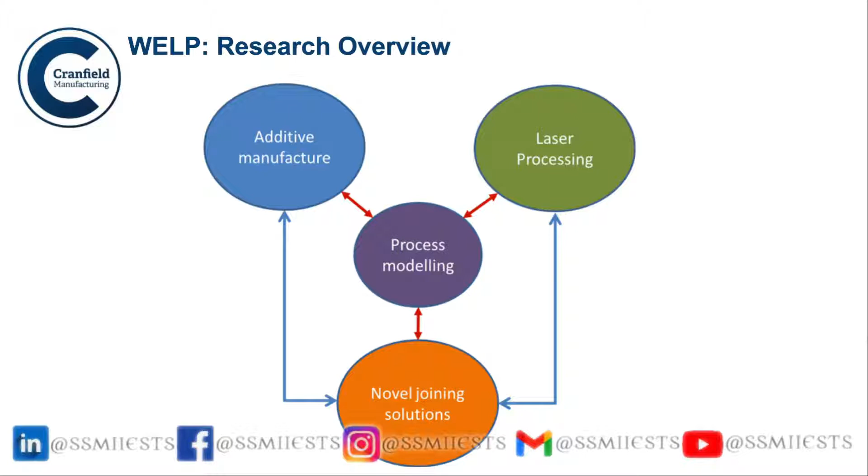So the research overview is we have three main wings of research, which are additive manufacturing, laser processing, and novel joining solutions. These are the three main activities that we have, and they're underpinned by process modeling. I will talk mainly about laser processing or laser joining in this particular session, but I will just give you a quick view of the

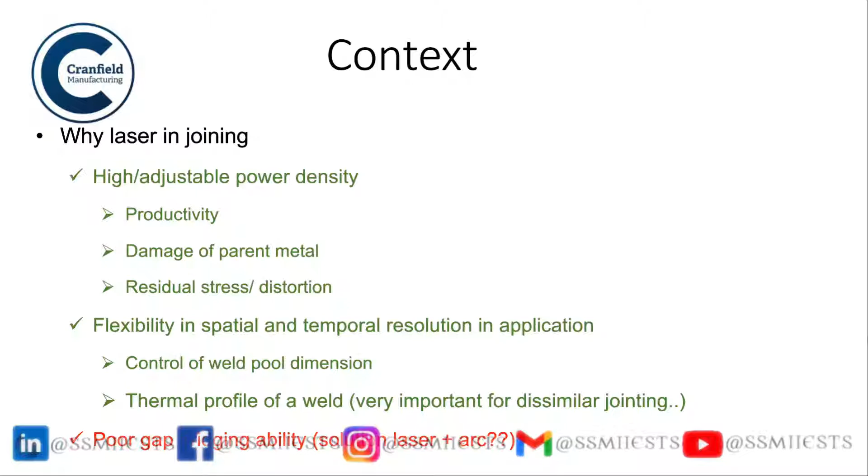However, laser has a disadvantage, that is poor gap bridgeability. This is a very important thing actually. Because when you do a joint, often the joint is not perfectly aligned. So you need your power source, or the heat that you're applying, to have gap bridging capability, and in that laser would not be very good. So a solution could be laser together with arc. That gives you the final solution on this.

So, possibilities with a laser. With this particular slide, I would like to show the different ways you can apply heat in a manner that forms the weld pool at a particular location. You can see these are two alloys, A and B, and you can have a weld pool with more of A, less of B, or something like an interlayer X, because it is required when you have dissimilar joining. So I will explain that.

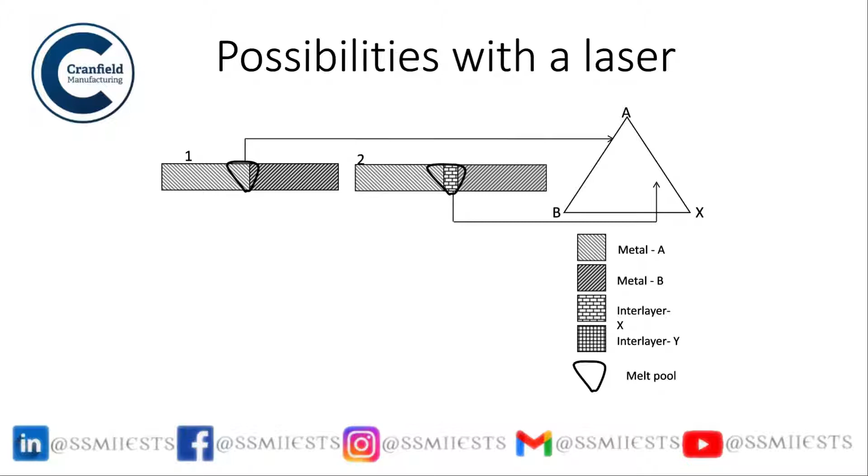And accordingly, in the metallographic constitution, you can have different compositions or different phase fractions depending upon how your weld pool is formed. So basically, what I'm trying to impress on you is you can control the solidification path in order to avoid certain possibilities, or you can lower the susceptibility of a system to crack.

Similarly, you can have different dimensions of the weld pool. The third one in the second row, I will demonstrate in one of my works how I use that. I will also show with a case study how you can have different dimensions of weld pool, and thereby control the composition and the diffusion of one parent metal into the other.

In the third one, as you will see, the weld pools are formed in all three different locations, and that is important in order to understand or prevent the diffusion of one atomic species into another, which gives you intermetallic compound formation and other problems.

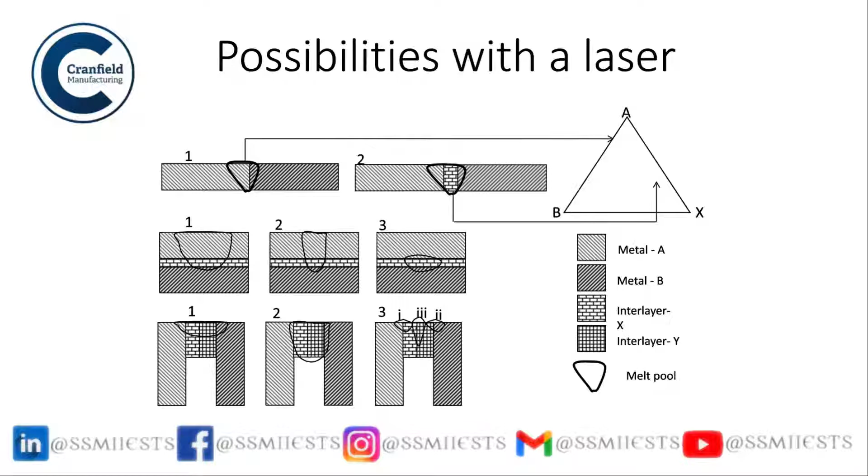So as I was talking on dissimilar joining, there are several reasons why you need to do this. This brings topological optimization in a design. They can use the complementary properties of different alloys within a particular component. There is very high use in transport, automobile, e-mobility sector, health and medicine, and also electronic sectors, particularly for battery applications in e-mobility.

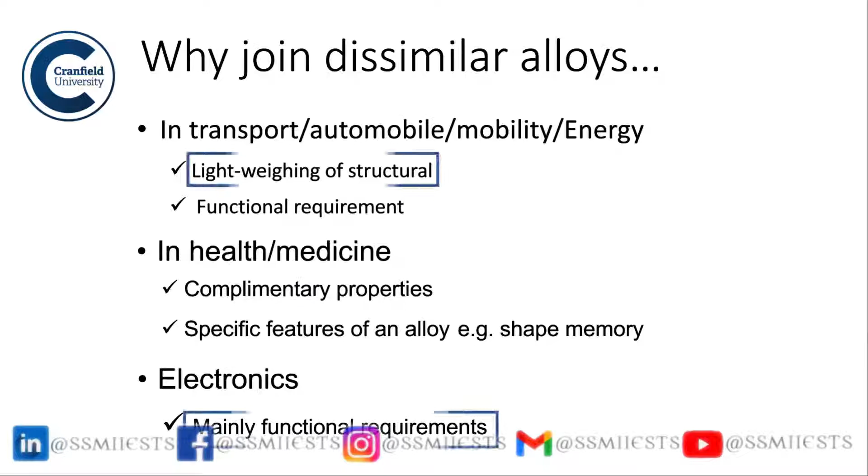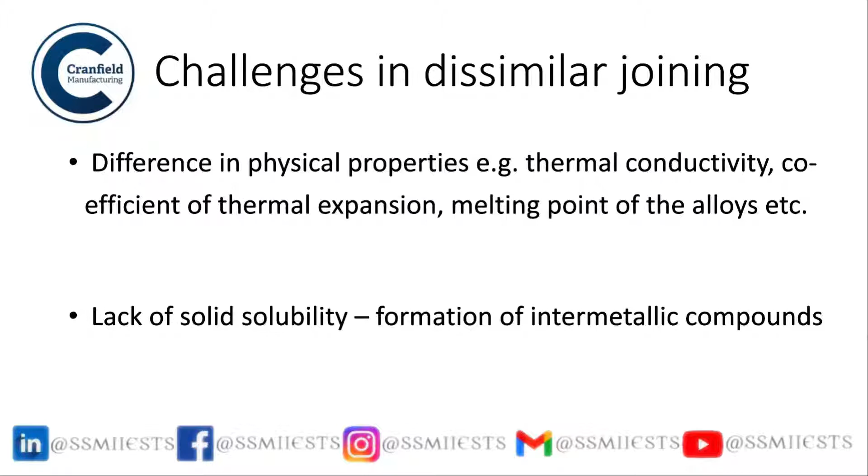I will talk about these two primarily in this presentation. So what are the challenges in dissimilar joining? There are two basic challenges. One is the difference in physical properties, be it thermal conductivity, coefficient of thermal expansion, melting points, and so on. The second, which is even more complicated, is lack of solid solubility, which leads to formation of intermetallics that are very brittle and can cause serious damage within a weld metal.

These are some slides which show the problems that happen when there's a difference in physical properties: non-uniform heat distribution, thermal stress, non-uniform composition, and difference in melting point resulting in intermetallic formation, which is the most complicated to solve amongst these.

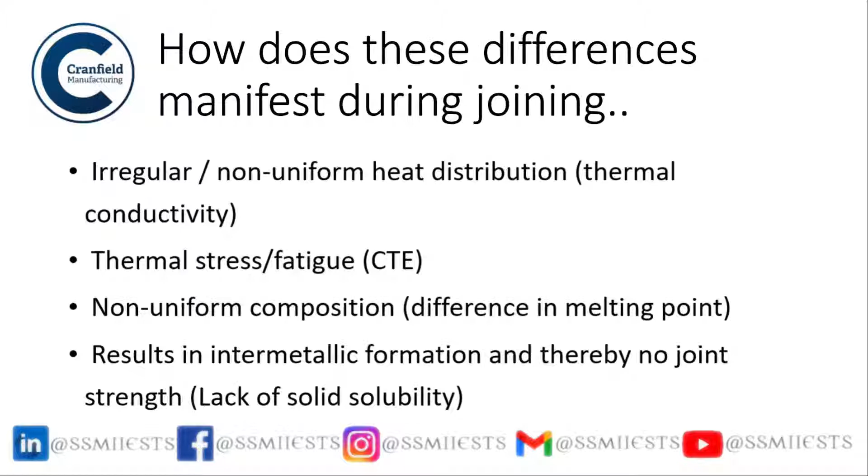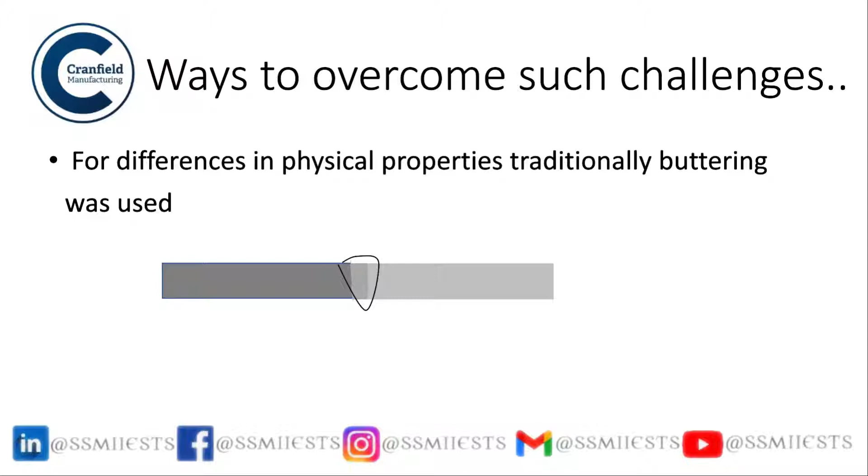So ways to overcome this: for physical properties, if alloy A is joining to alloy B, and by the shade of gray I'm trying to show there is a difference in physical properties, what you do is add an interlayer, or a buttering layer, between them. Once you machine them, you can create the joint, and thus avoid problems like thermal stressing, bending, and even solidification cracking.

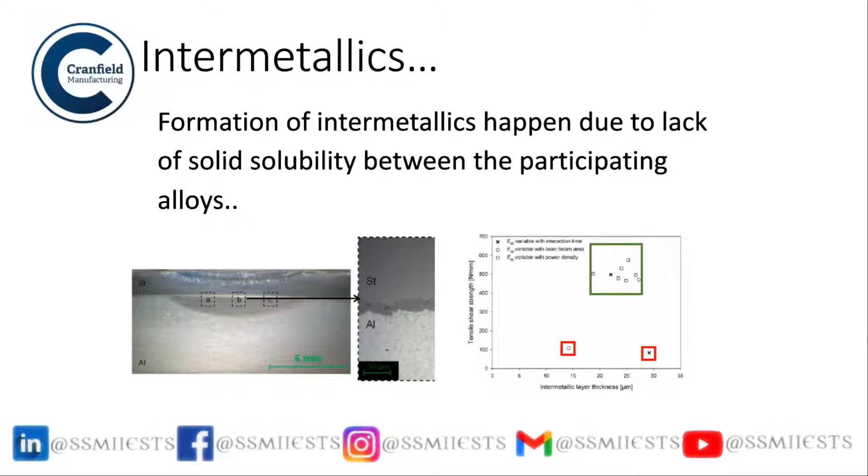Now this is another graph which shows how the tensile shear strength, on the y-axis, varies with the intermetallic layer thickness. As you can see, at a lower thickness you can also have a lower strength of a joint, and that is because it depends not only on the intermetallic amount or volume, but also on the total welded area. This was studied in this research, and we tried to form the solution for joining aluminium to steel.

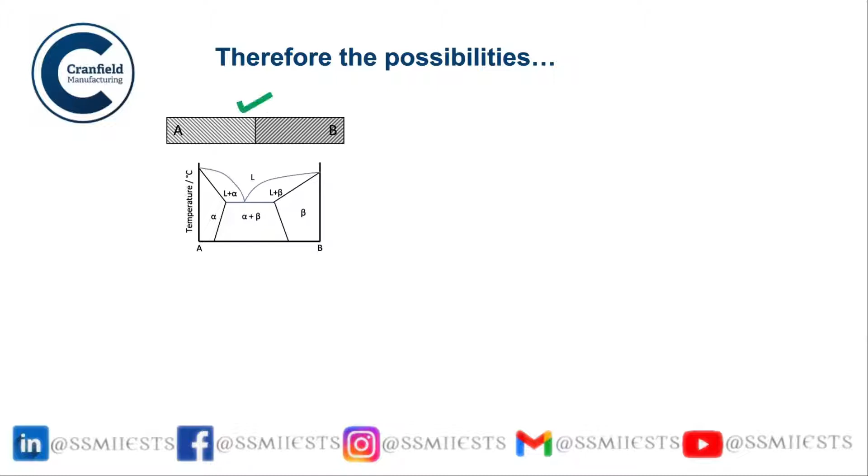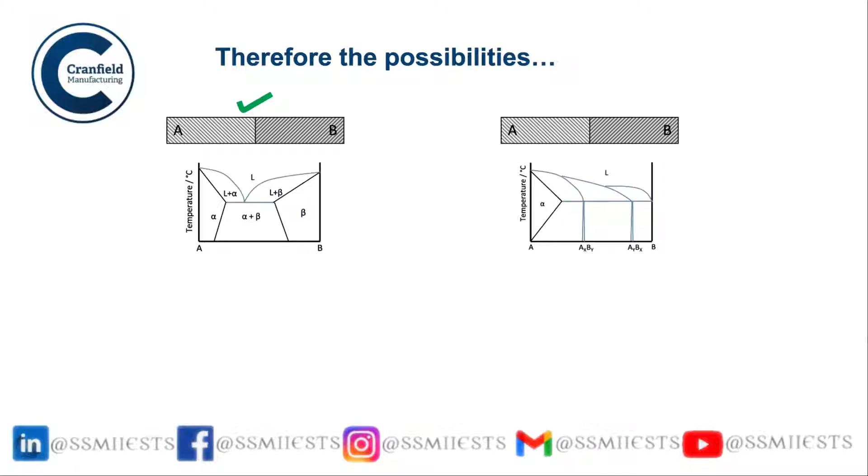So what are the possibilities when it comes to intermetallic? When you join an alloy A with alloy B, it can be perfectly fine—they can have nice solid solubility amongst each other, and you have no issue of joining. Similarly, you can have a scenario where there is practically no solubility at room temperature between the two alloys, which will give you excessive intermetallics, making the joint liable to fail.

Now, this will not work. So what is the option? You can have another interlayer, which is C. You have to ensure that A goes well with C, and B goes well with C, and therefore you can make a joint. However, it might happen that both do not go well with C—say B doesn't have any solid solubility with C. Then you might have to introduce another interlayer, and that will give you the solution.

And now I will show you with some of the work that I have done how this was possible.

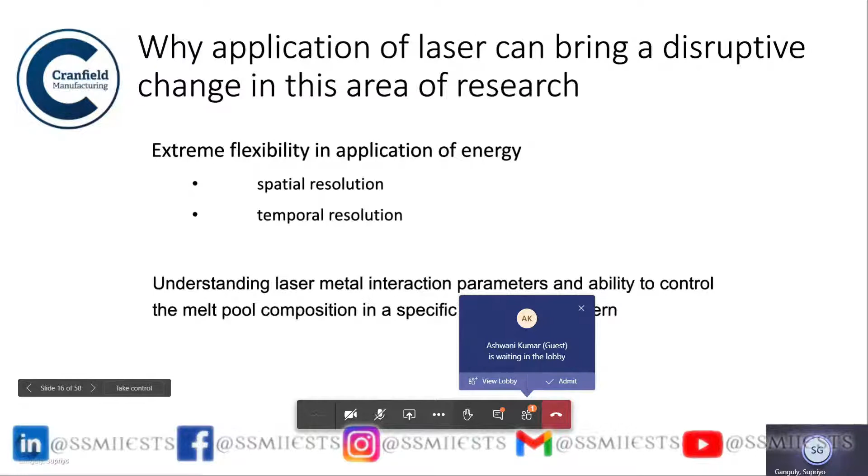So laser is the only power source that can be used for such type of application, as it gives you the required spatial and temporal resolution, understanding of laser-metal interaction parameters, and the ability to control the melt pool composition in a specific and desired pattern. So these are the two reasons why laser will be practically the most appropriate solution when you form such joints.

So as you see, this is a laser beam, and the spot size of the laser, say, is d, the diameter. What we see in a machine is laser power, travel speed, and spot size. But when we convert them, what the metal is seeing is basically power density, the interaction time - demonstrated by this small animation - and then the total specific point energy that is applied on a joint.

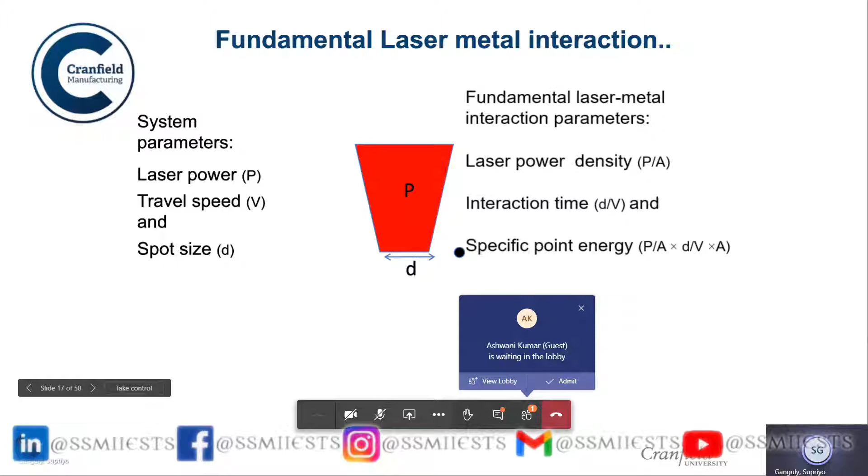So you need to understand a process from that perspective in order to make it suitable, and also so that you can do work with different lasers, because this d normally changes with different lasers, and that is an important thing for you to appreciate.

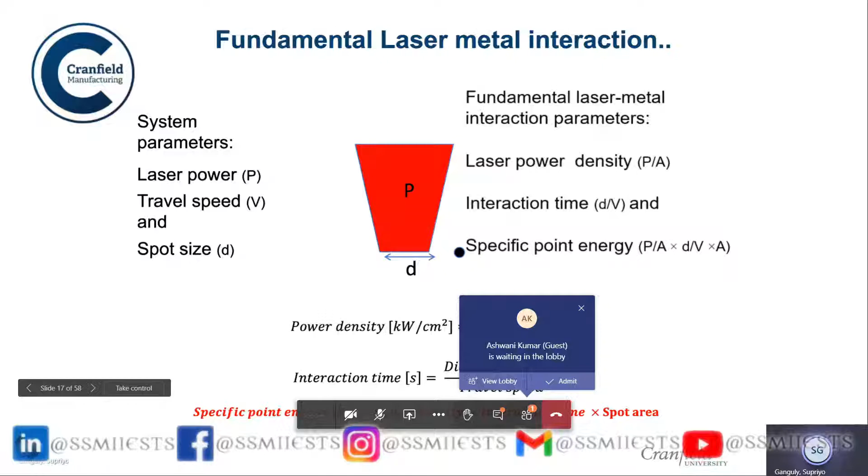So there is an example of a paper published from our department. It is in the area of basic laser-metal interaction.

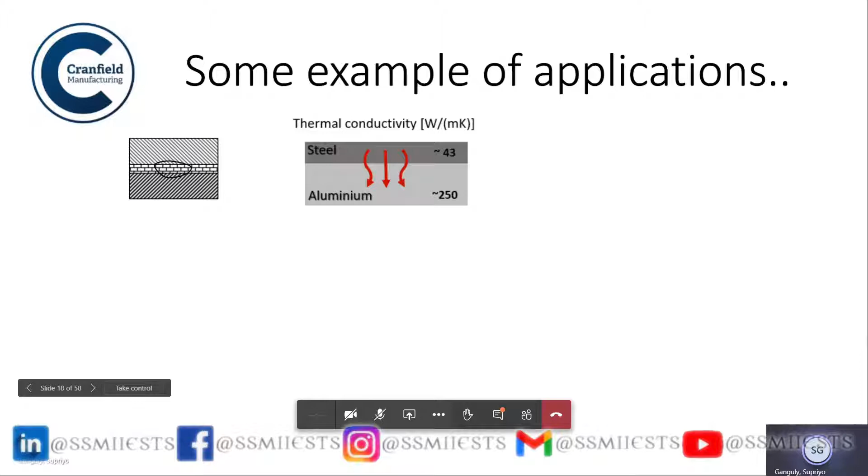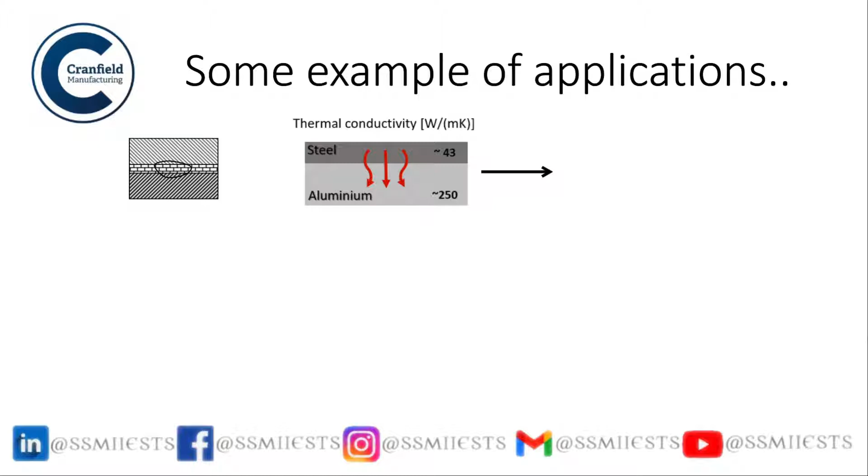Some applications now - as I said, you can have a scenario where you conduct the heat from steel to aluminium, because the conductivity of aluminium is much higher compared to steel. And you can always use a copper backing bar here. So the heat is conducted from steel to aluminium, and you principally avoid melting, avoiding creation of a fusion zone with all molten steel and molten aluminium.

Because that would be catastrophic in terms of intermetallic formation. You can see nicely the difference in the melting point of both of them, and that gives you the basic possibility to create such a joint.

However, you can see here, this is the actual macro of that, and at the top it is molten. The steel is about 2 millimeter thick. Now you can see this molten steel at the top, so you really cannot create a gradient where at the interface aluminium will be molten, which basically means 660 degrees centigrade for pure aluminium. But for aluminium alloys it might be 550 and so on.

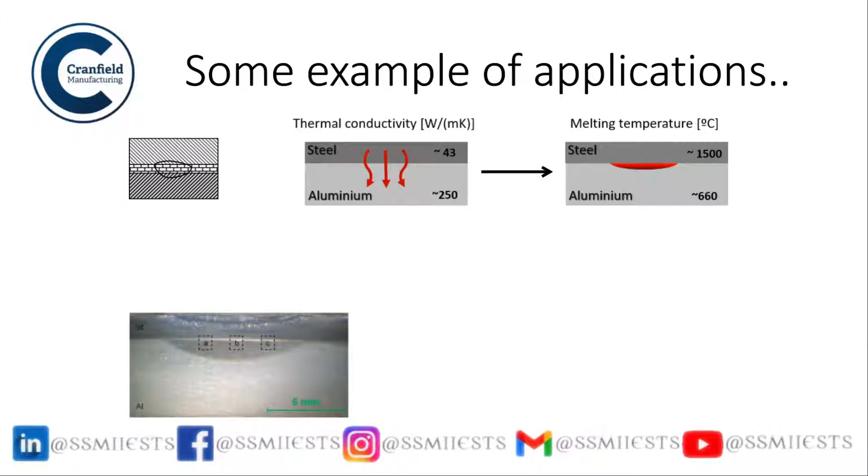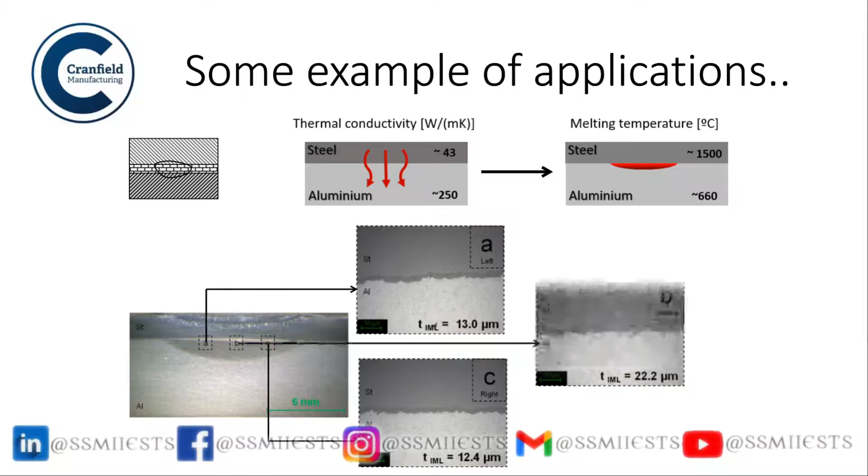And here is steel, which is roughly 1470, 1480, like that. So you can see you can create a kind of thermal gradient that will allow aluminium to melt at the interface and wet the steel. And based on that, you can then study the intermetallic formation in the different parts.

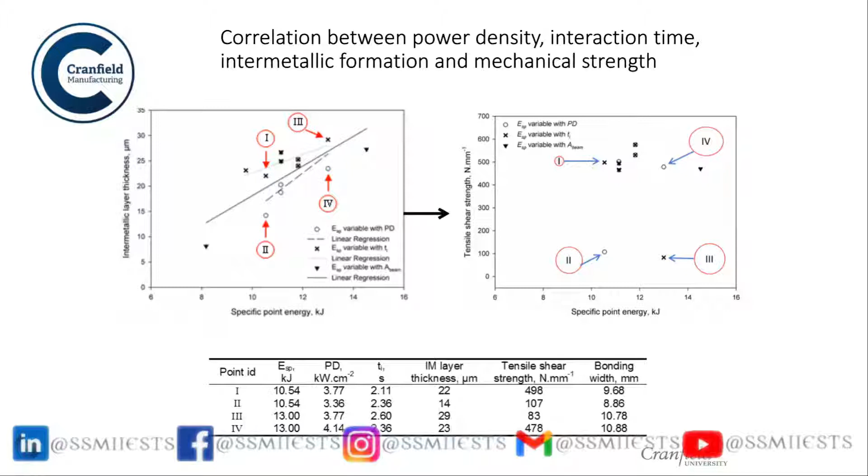And this particular combination was found in this work and explained in this particular article, which is written by my student Sonia.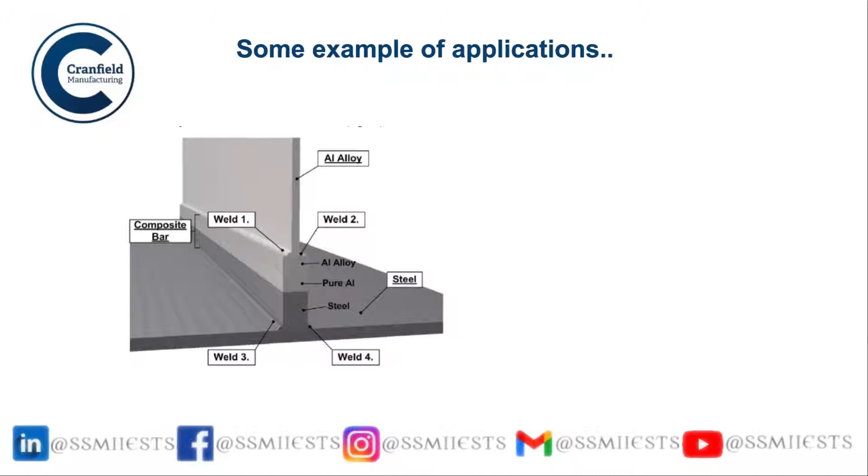One example is in the ship hull structure, where presently this kind of composite bar is used, which is explosion bonded. So this is steel, this is aluminium, and this is the explosive bonded bar. The steel part is joined to the steel part and the aluminium part to the aluminium part. This increases the cost for manufacturing a lot, because you need an expensive bar plus 4 weldings, whereas normally you can do it with 2 arc weldings.

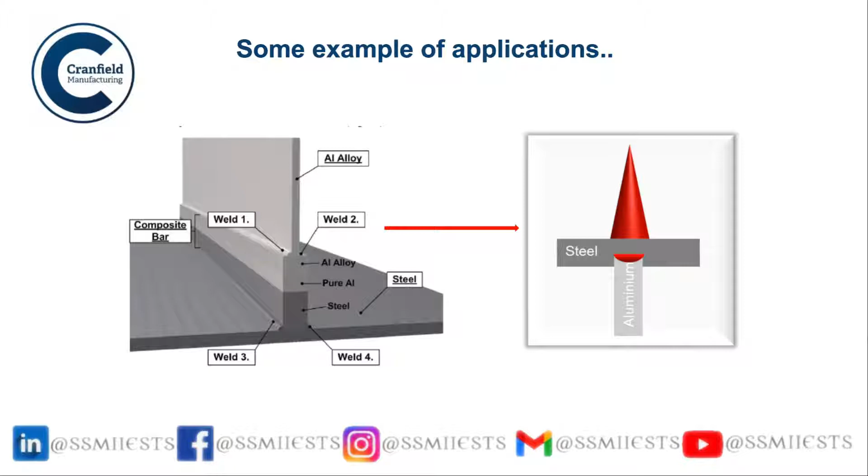So what we proposed is a structure like this: steel and aluminium go inside, and when the laser comes like this, a design modification was required to make it suitable for a specific application. The heat should pass through the steel and form this joint. This is done using a setup in our lab, and basically a T-joint is formed at the end of this process. So it will be possible to use laser in an intelligent manner to modify the design of a structure in order to create a joint. These are particular examples of how laser can be suitable for such thick structures.

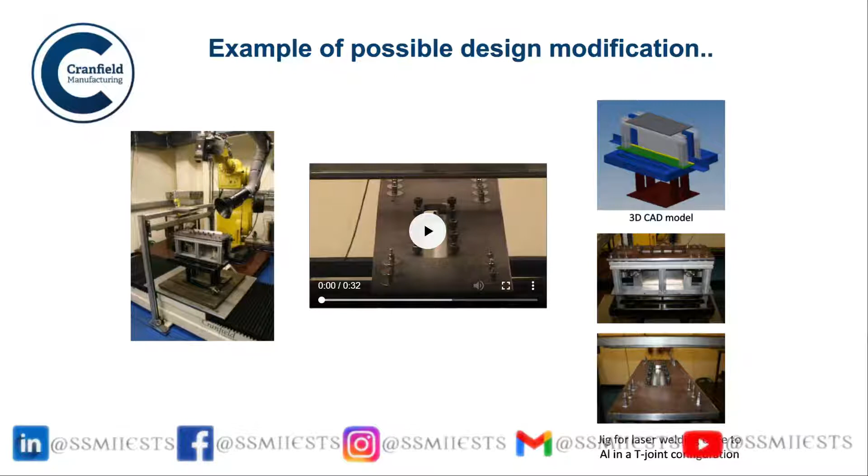Another example is microjoining. I'll talk about joining stainless steel to nitinol. Nitinol is a shape memory alloy, with very good applications in dentistry as well as other medical applications, and it often needs to be joined to stainless steel.

The problem here is serious, because stainless steel contains iron atoms, and nitinol contains titanium atoms - nitinol is basically 50 atomic percent nickel and titanium. So titanium and iron are a no-no situation. They cannot form a solid solution, and the intermetallics they form are absolutely brittle, so you cannot form a viable joint between iron and titanium.

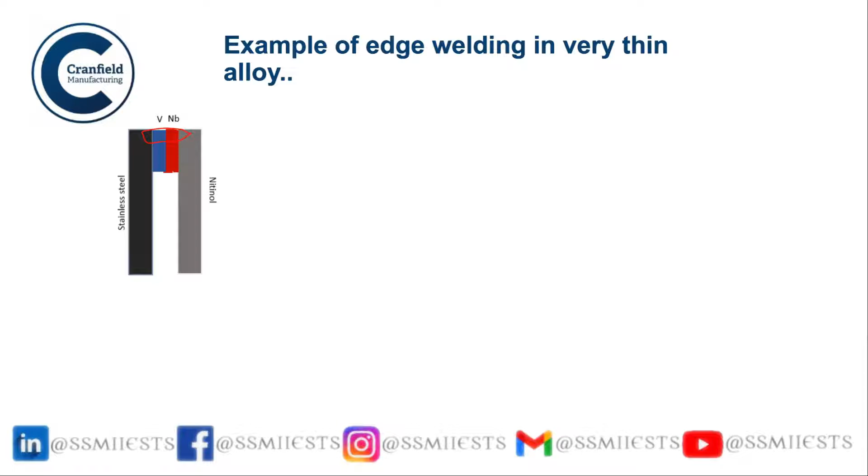So a study was done in our center to understand how we can form joints. Recalling my previous schematic explanation, we use two different interlayers: one is vanadium, the other is niobium. Vanadium is good with stainless steel, niobium is good with nitinol, and vanadium and niobium are good with each other. But if you form a weld directly like this, what happens?

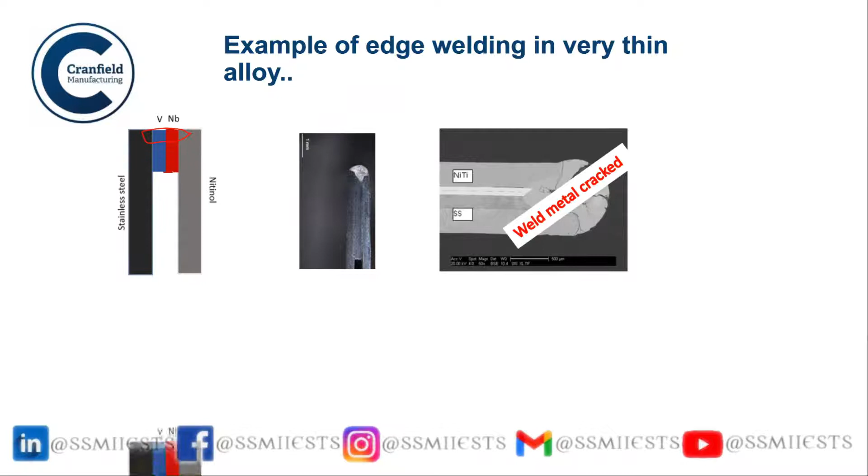You completely crack it, because the titanium atoms can travel through this melt pool and form this brittle intermetallic on the other side. However, if you do separate welds between vanadium and stainless steel, niobium and nitinol, and then vanadium and niobium, then it is possible to achieve a good joint.

This was subjected to very strong testing, and you see here the breakage happens from the nitinol side, so the weld metal itself is okay. If you understand the reason why something is cracking, and take necessary design precautions in manufacturing, then most likely you will be able to achieve a good solution towards the end.

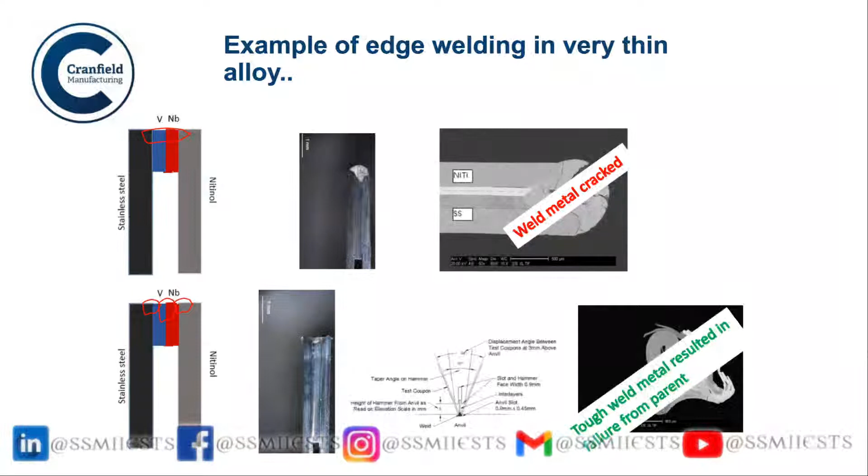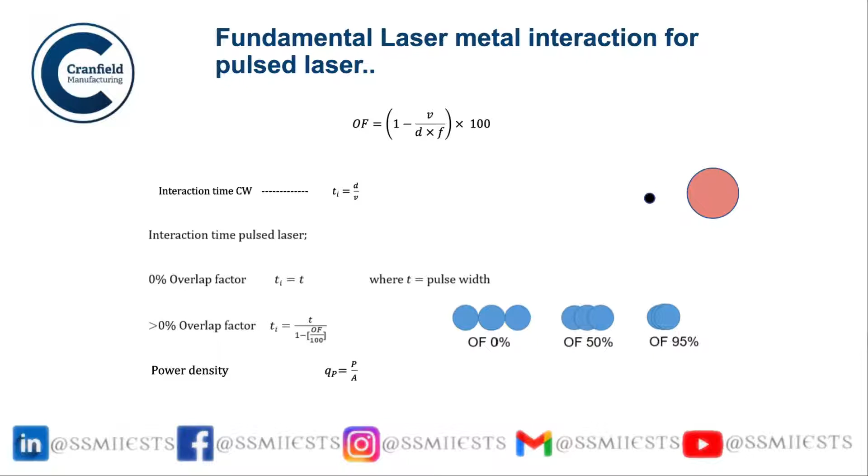I tried to show how different overlap factors can be effectively built into the interaction time calculations, helping to get a proper understanding of how much heat is actually applied in a particular situation. Now I'll talk about some applications, some battery applications in new mobility, where I'd discuss joining of copper and aluminium.

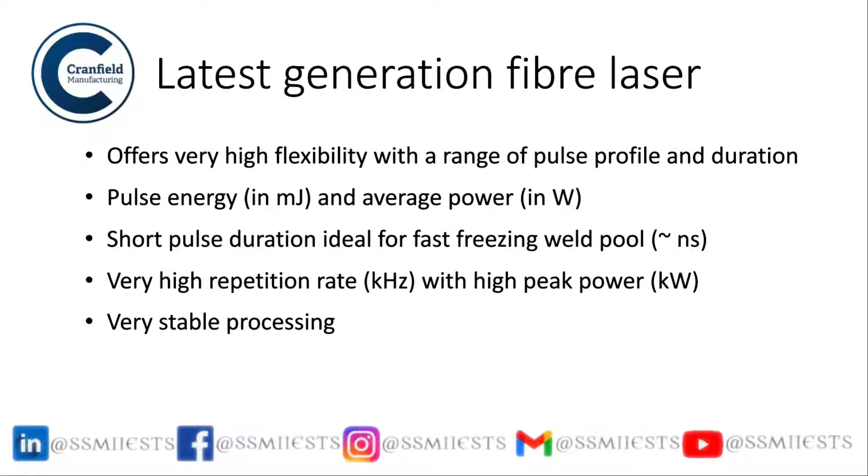The latest generation fiber lasers offer very high flexibility and a range of pulse profiles and durations. Pulse energy and average power can be controlled very well. Short pulse durations are ideal for fast freezing, which is important for dissimilar joining. Very high repetition rates allow a reasonably high peak power and average power, giving very stable processing. All these factors make it a very good tool for dissimilar jointing.

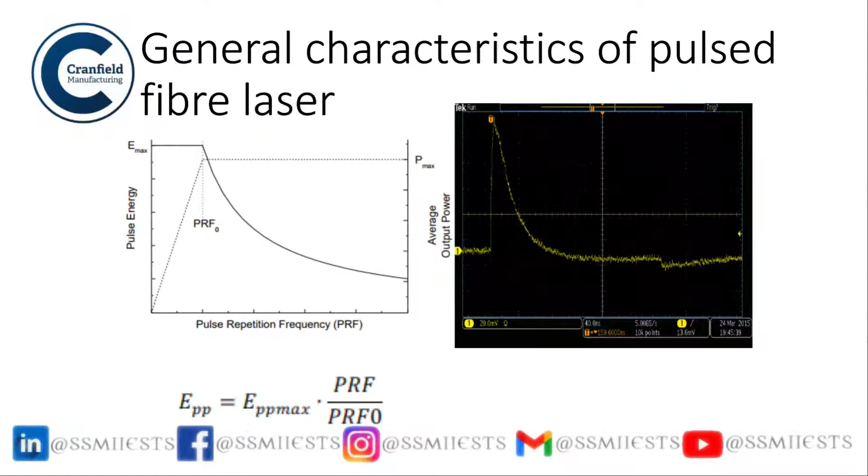And this is an expression of how the energy applied, maximum energy in a particular laser. So with the help of a cathode ray oscilloscope, we basically deciphered how the different pulses behave and act before we apply them. So this particular graph basically is showing how the energy per pulse changes with the average power.

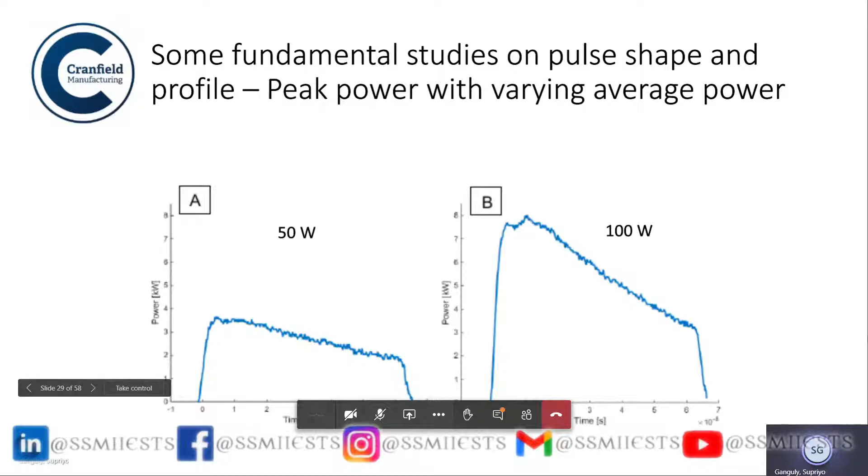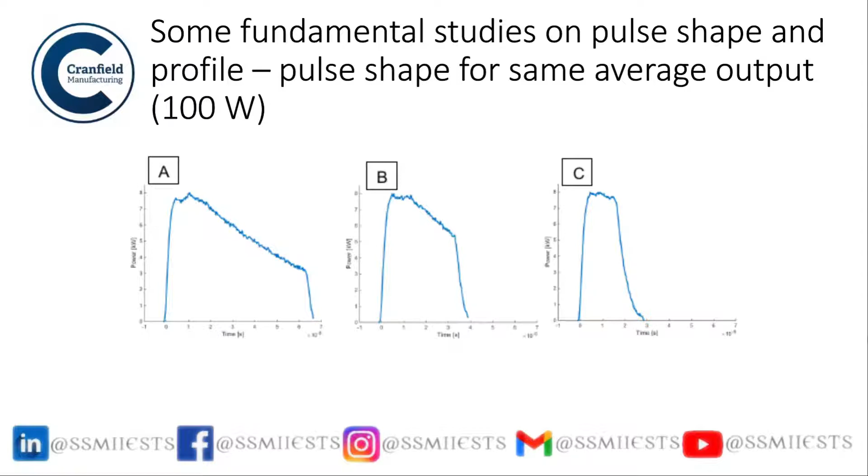Similarly, as we go along, this shows how, for two different average power outputs, the peak power output changes. And you see here, the time duration of the pulse remains the same. Similarly, in the next one, the time duration is changing while the peak power is almost kept constant. So what I'm trying to convey is the temporal resolution, or time-dependent application of the energy, can be controlled to a very high level in such lasers.

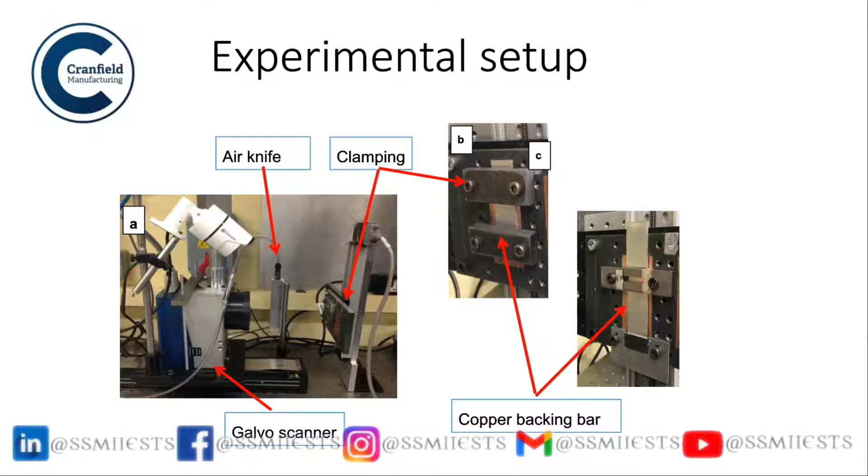So this is a work which is done for joining of copper to steel, stainless steel. And you see this is the overlap. Sorry, this is not stainless steel, it's copper to aluminium. And you can see here the experimental setup which was used in the lab, and we used a galvo scanner because the laser needs to be moved very, very fast. And there's the copper backing bar that we have used in this particular application.

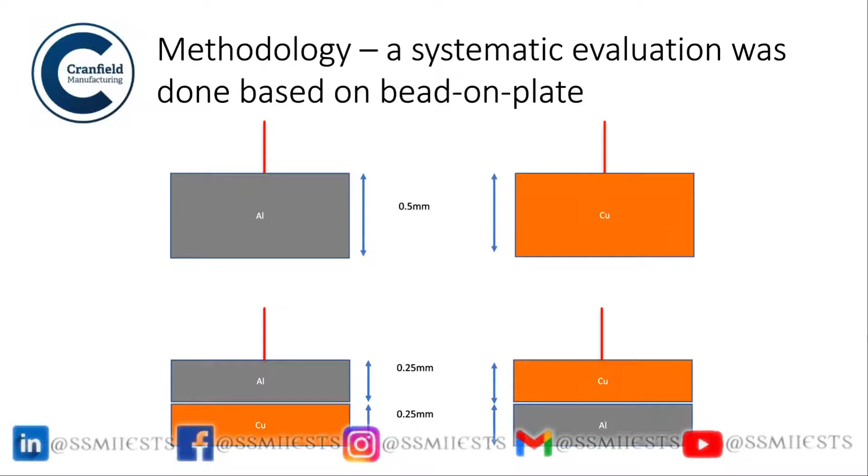So quickly, a very structured analysis was taken. Aluminium of 0.5 and copper of 0.5 were first studied as a bead on plate, just to see how much penetration happens. And then aluminium 0.25 and two aluminium 0.25 millimeter were tested. Similarly with copper, and then aluminium and copper were tested as a dissimilar joint, to understand how the heat flows between the different joints.

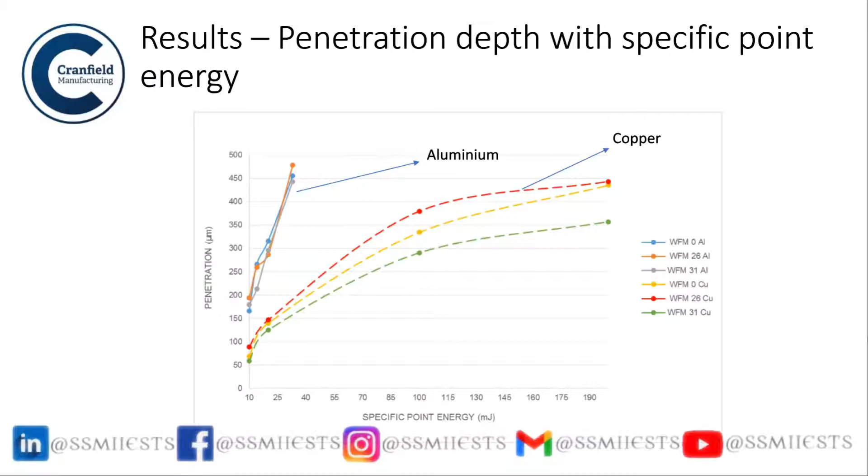So in the bead on plate result, as you can see, for the same application of energy, you get much higher penetration in aluminium as compared to copper, which is not surprising because copper is highly conductive and the temperature rise is rather slow in copper as compared to aluminium. And here this graph shows, for the same type of waveform, how the two alloys respond to the heat.

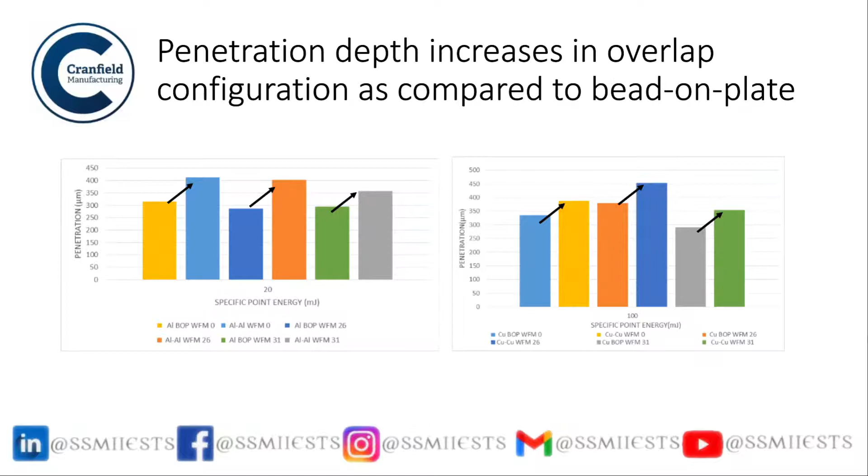So aluminium on top and copper on top, and as you can clearly see, the weld formation is much better when copper is on the top. The reason being, in this configuration, when aluminium is on the top, the joint formation was not contributed by copper by much. But here, the copper penetrates well within the aluminium when it is being irradiated.

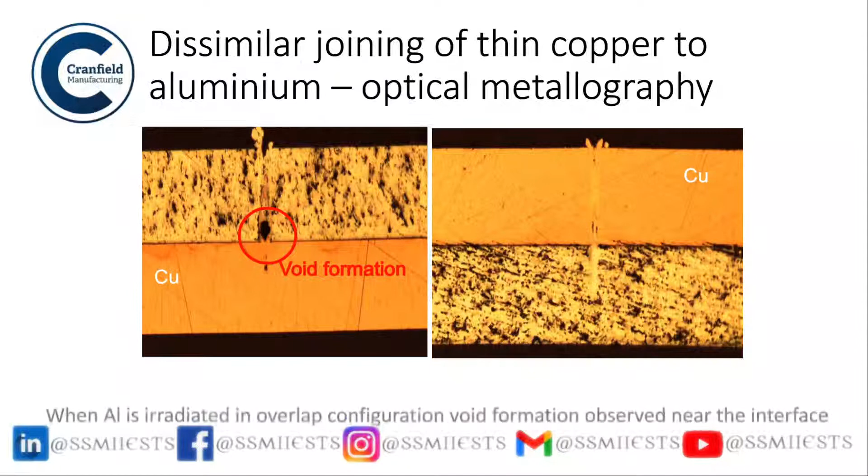So you will see now from the EDS curves that when copper is on the top, it gives very good penetration of aluminium, and copper also penetrated significantly in the aluminium, whereas in the other case, there was not much penetration of copper into the aluminium, and therefore the joint formation was not very strong, although it was not seen that much in the mechanical strength, but that was what was found from the EDS analysis.

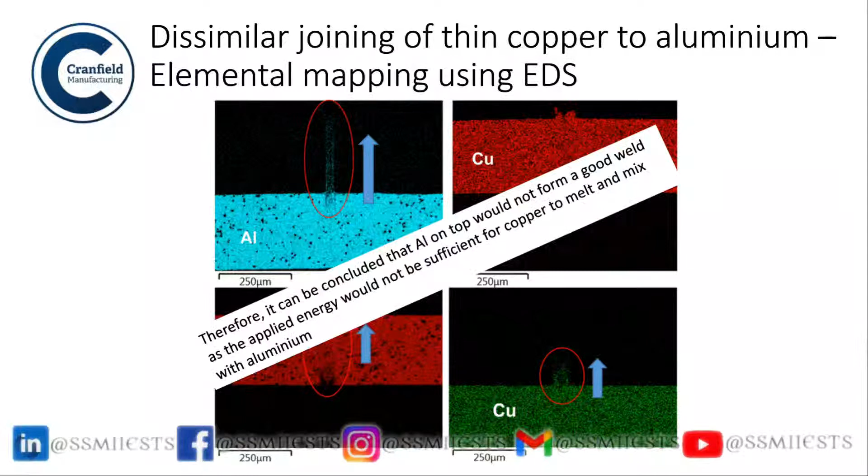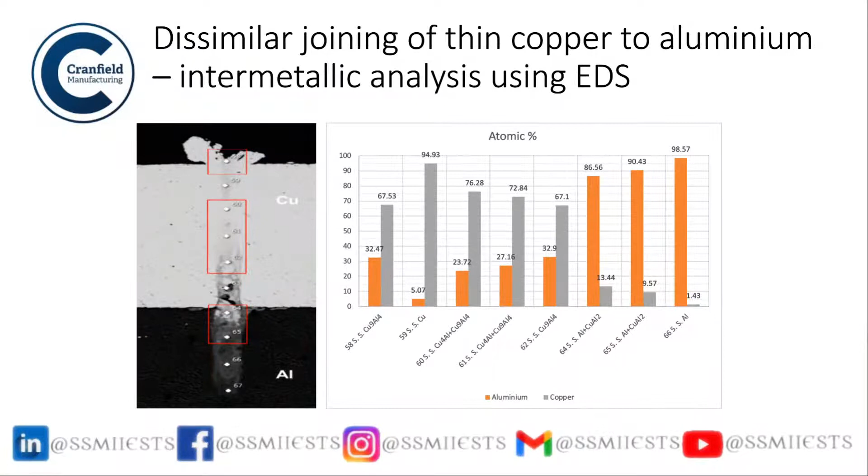So these are some elemental mappings through the joint, and as you can see here, when copper is on the top, in this part you have significant penetration of copper, which makes the joint very sound, whereas when aluminium is on the top, aluminium didn't penetrate at all in the copper bit, and that is the problem.

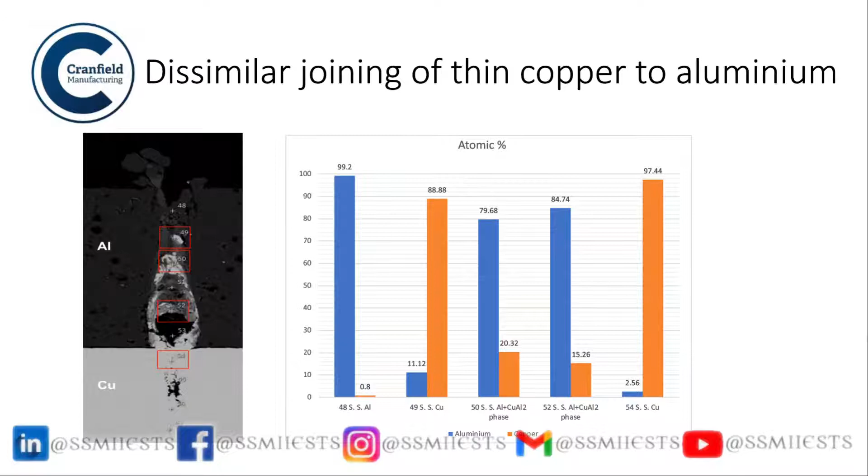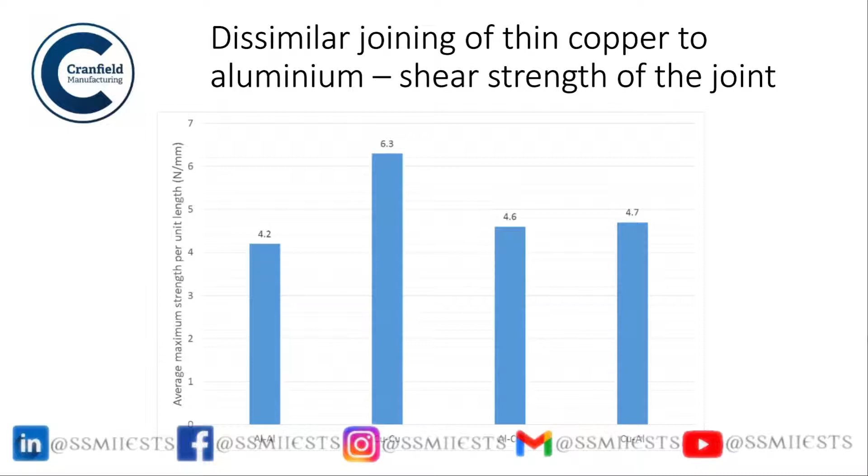So now I have talked about laser for dissimilar application. Now I will just quickly browse through some slides on higher productivity, and this is for real structures like, say, oil and gas and others. And you will see how hybrid laser welding can be an important tool in getting some high productivity joining in thick structures.

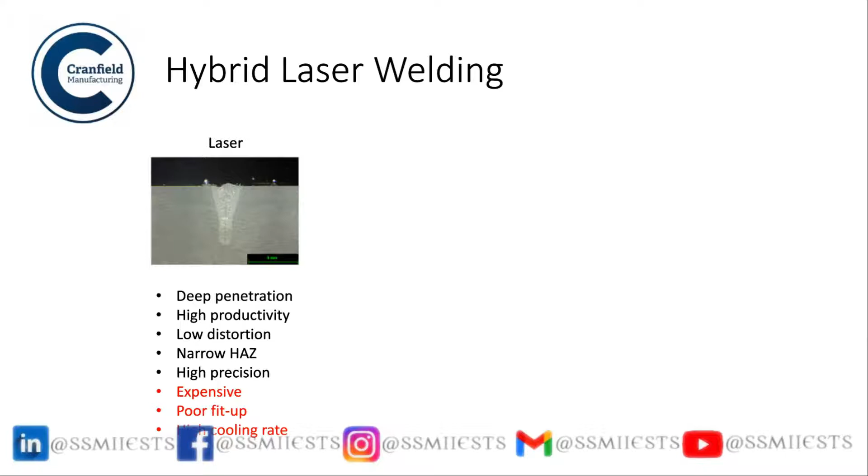So laser on its own can penetrate well, can give high productivity, low distortion, narrow heat affected zone, and all those things, high precision. But it is expensive, has poor fit up, and the cooling rate is very high, which is not very desirable in some steel structures, particularly when the carbon equivalent is high.

But arc is kind of complementary. It gives you good fit up, relatively cheap. It is well known; people know about these processes a lot. However, it gives you more distortion and it is a bit slow. So if you can join them, it can give you the benefits of both processes together. And that is what I will show you in this hybrid experimental work.

So why hybrid is important is when you join two pipes. Generally, pipes nowadays are produced from thermomechanically controlled steel. They do not have any alloying or very minor alloying, and the strength comes from the mechanical processing in the mills or while cold rolling. So when we do a weld, the steel will be molten and joined by the same parent metal. The flip side is it will lose all of its strength because it is molten. So we need to add some filler wire.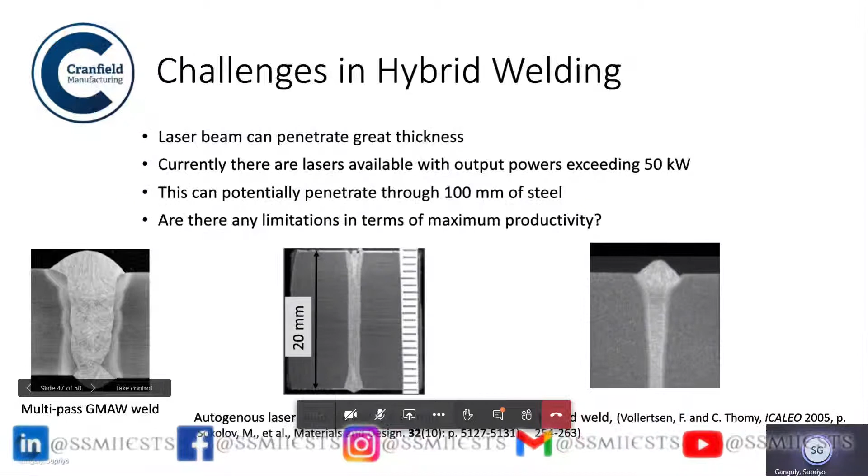So practically you need to understand how the two power sources will respond or interact with each other in order to push the filler wire through to the bottom. And this is work that was done at our place 2 years back, mainly in the area of hybrid laser arc processing.

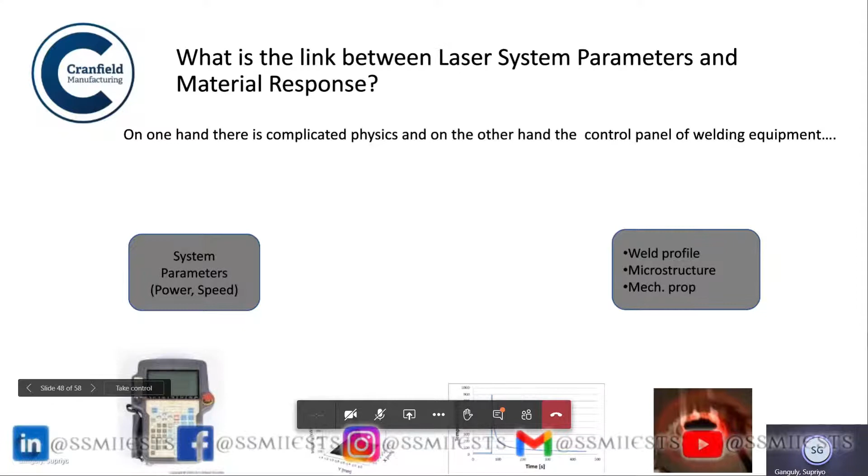So you can see here there are system parameters, such as speed, and then there is the weld profile. What links them is basically fundamental parameters and material properties, which subsequently determine the thermal cycle and the cooling rate. So all these factors need to be controlled in order to achieve your desired weld.

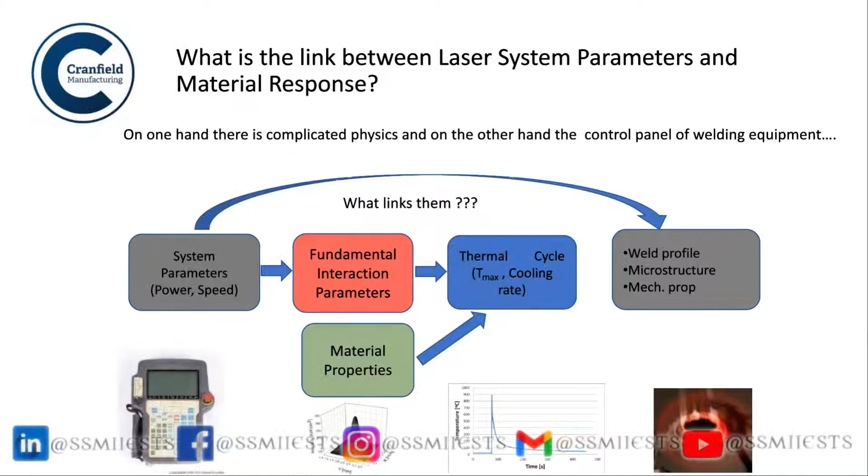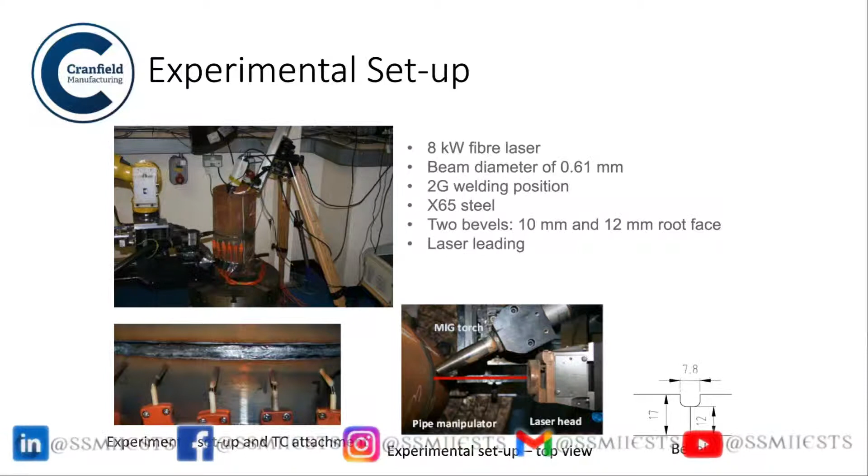So here are some setups that are shown. I will not spend much time here, but you can see this is the kind of bevel. These are 17mm thick steel with a 12mm bevel because you want to achieve full penetration by laser. And X65 steels were studied. And these are some of the factors that we found when we control the laser power and the wire power, and see the different weld profiles.

So as you can see here, this weld was made with laser power 6 kilowatt, laser beam diameter 0.6, and the arc power, when converted, is 6 kilowatt. Now, how will it manifest in a weld when you keep the laser power constant and increase the arc power, or vice versa?

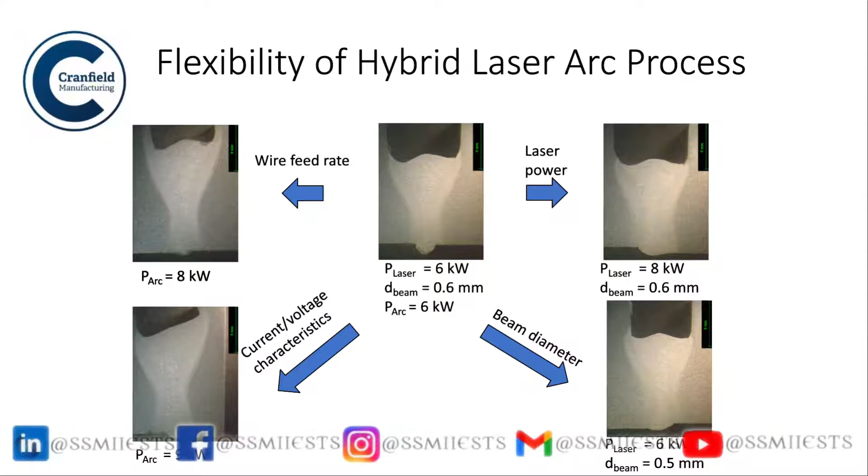So filler wire. In this particular study, we used a duplex filler wire just to have chromium as a signature element to see how much it penetrates. I know that it will be cracking and the weld will not look very good, but still we did it because otherwise it is very difficult to accurately quantify the mixing.

Now in this one, as you can see, we've kept the laser power the same, and the arc power is basically manifested in terms of the wire feed speed, and how we can change them in order to achieve full penetration of the filler.

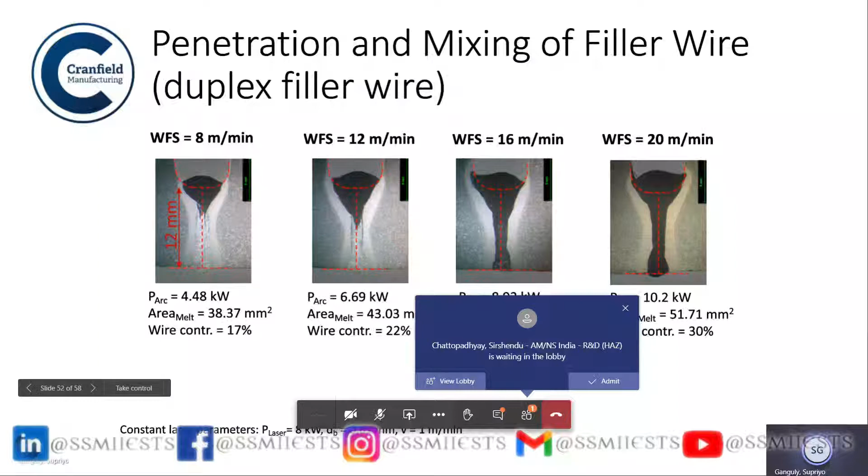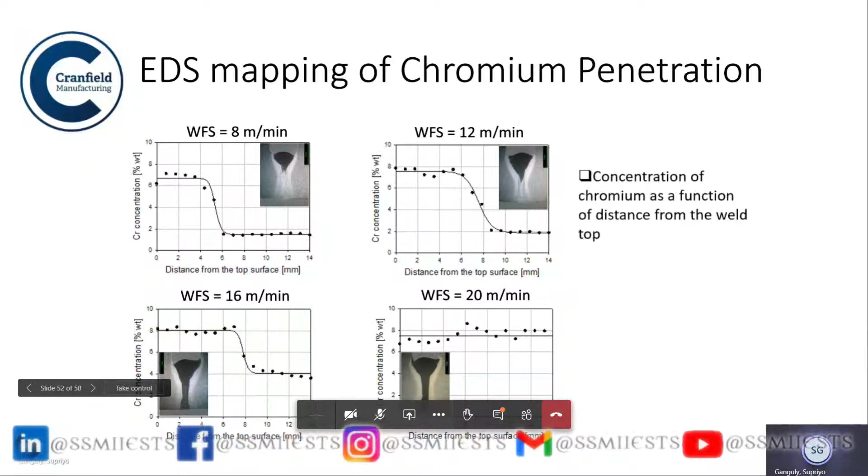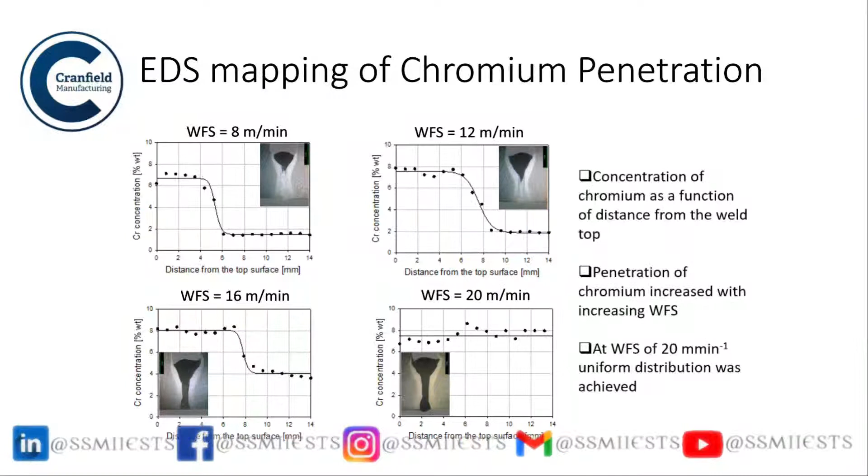Okay, so these are the chromium mapping, or scanning of chromium, using energy dispersive spectroscopy. And here you can see at a particular wire feed speed, you have a fully penetrated filler. And this is what you really need to know; I really need to decipher that for different types of power sources, how they interact in order to create a very effective joint. And also laser power can be significant in achieving the mixing.

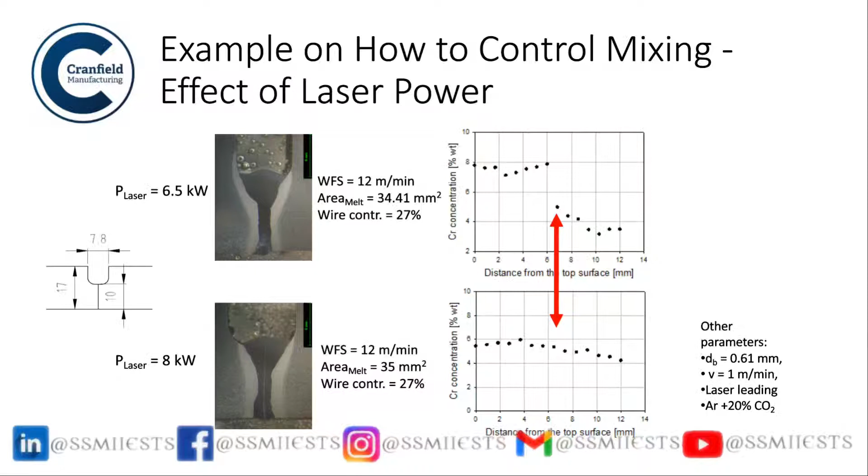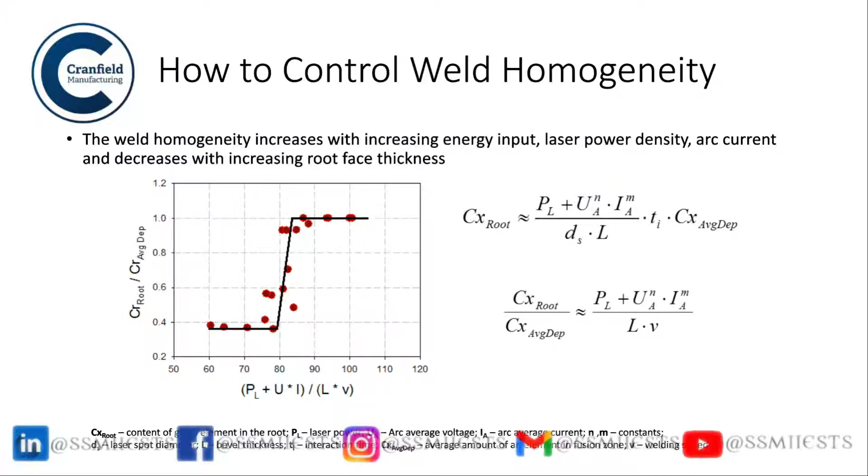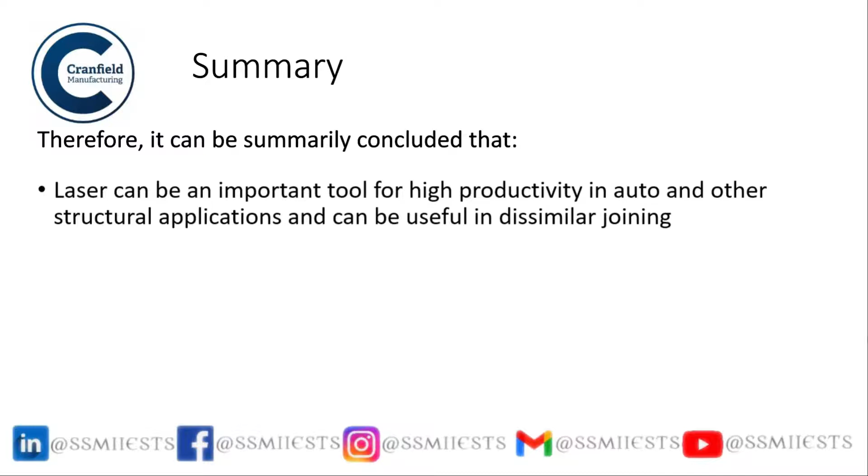So in summary, I have to say that laser is an important tool for high productivity in automotive and other structural applications and can be useful for dissimilar joining. However, in order to realize the full potential, it is important to understand the laser features and the corresponding laser-metal interaction characteristics to apply it in an intelligent manner.

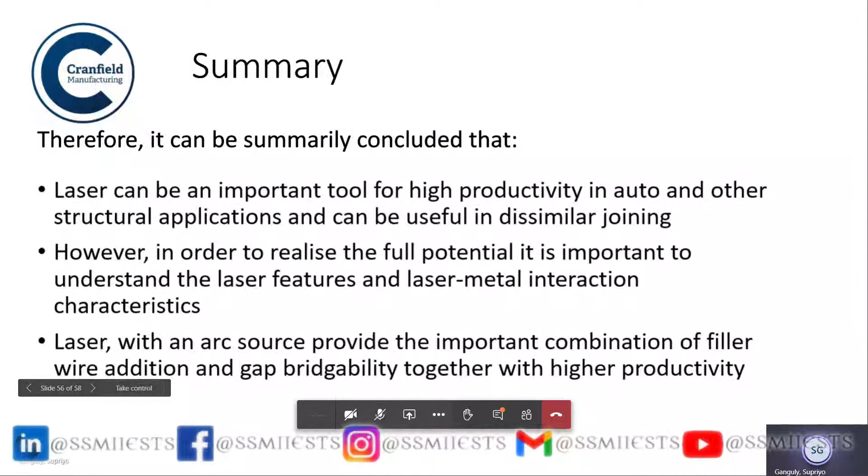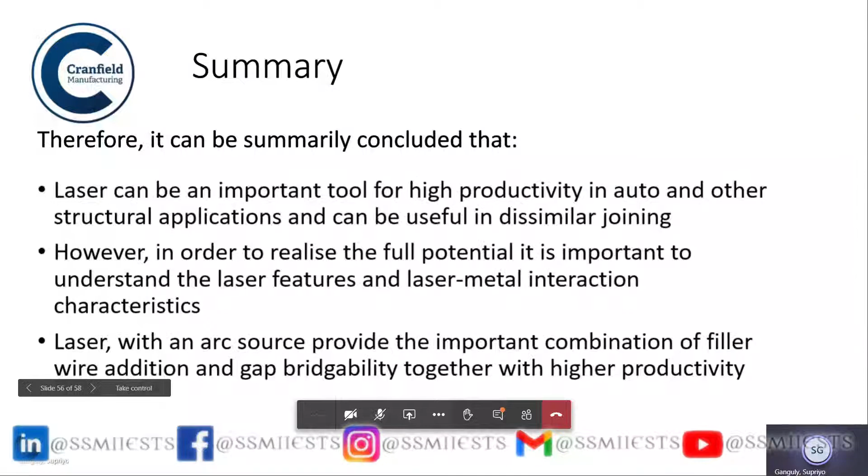And for high productivity, high thickness or large dimension structures, laser and arc can provide a very important combination to achieve filler wire addition as well as gap bridging ability in order to realize the full potential with regards to the productivity of the process.